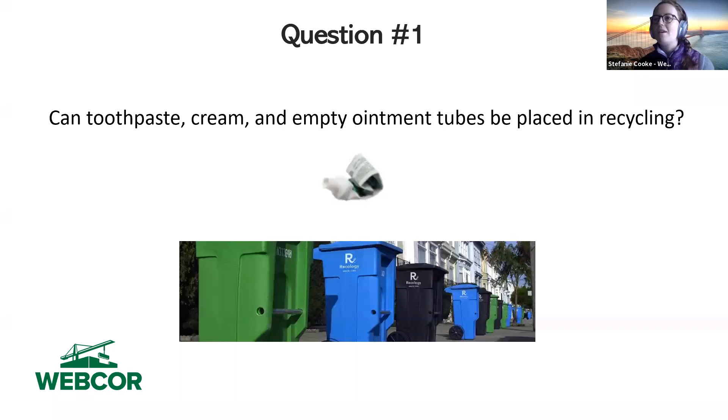Question two: envelopes with plastic windows are recyclable, true or false? This one is actually true. I initially thought you had to rip out the plastic window and recycle them separately, but these can actually be recycled together.

Which cart do daily contact lenses go in? Green for compost, black for trash, blue for recycling. This is actually a trick question, because it goes in none of these. There's now a program TerraCycle has partnered with — Bausch and Lomb, I think is the name of the company — and they will collect your daily contact lens boxes and recycle those. Again, reach out to myself or Adele. If not, they go in the trash.

On to the next question: plastic bags with the chasing arrow symbols are recyclable in the blue cart, true or false? This one is actually true and false. Typically, if you just throw one plastic bag in the recycling, it cannot be recycled — it often gets caught in the machines, it's too small, and it's obstructive to the process. However, if you group your plastic bags together, like put a bunch of them in a smaller plastic bag about basketball size, you can put that in your recycling and they'll recycle it. Or take them somewhere like a Lucky's down the street from me that recycles plastic bags. A lot of retailers like Best Buy or Target also have a collection point for plastic bags. Or even better, avoid plastic bags altogether.

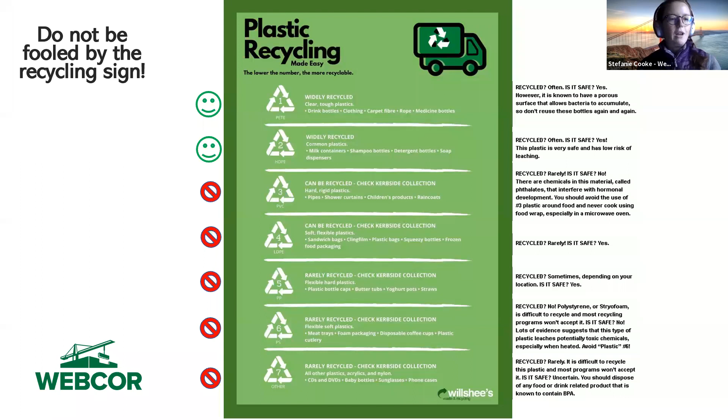So don't be fooled by the recycling sign.

Question 5: utensils, which cart do they go in, blue or black? This kind of depends what county you're in, but typically they go in the garbage. If you're in San Francisco, however, they do recycle these, so you can clean them and put them in. As a general rule, small plastic items are difficult to recycle because they're too small. A pro tip: don't order plastic utensils. When you order takeout, just ask for no utensils and use reusable cutlery.

Question 6: paper towels, which cart - compost, trash, or recycling? We had a big discussion on site about where these need to go, because it's paper towel, not just paper. Paper towels go in compost, always. They can't really be recycled because the fibers are too short, from what I learned in research. So even if they're dry, put them in compost. Typically paper towel gets dirty anyway, it's got food on it, so it can go in compost. Don't put them in the trash.

Next question: do or don't bag your recyclables. I've seen my neighbors doing this - this is false, you do not want to bag your recyclables. One, the crews sometimes don't know what's inside the bags when they pick them up, so for safety reasons they'll just throw it in the trash. Or two, the plastic bags can get destroyed or caught up in the machines. So again, do not bag your recyclables - they should be loose.

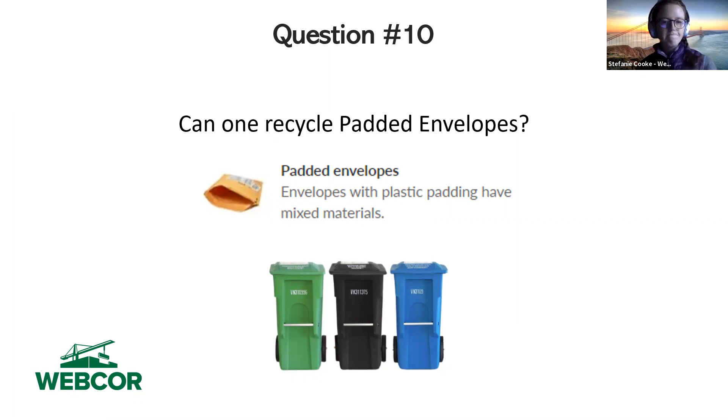Shiny food wrappers, can they go in recycling? The answer is no, they go in the trash, unless you're partnered with a program like TerraCycle. In my project we have a TerraCycle box right now picking up food wrappers, including candy bar wrappers and any bar wrappers - those can be recycled through TerraCycle. So unless you have a TerraCycle program, those go in the trash.

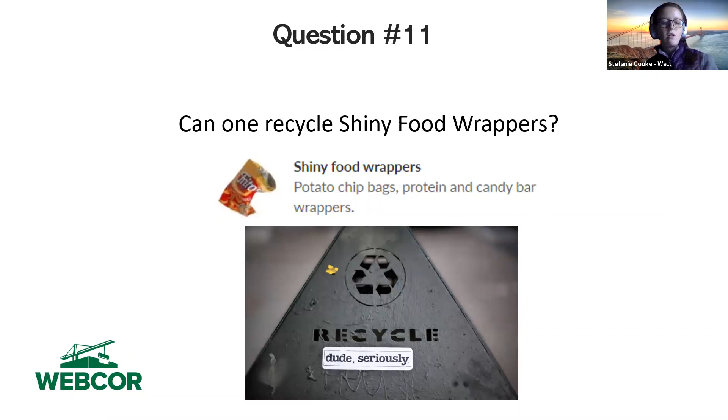This one came up because we use a lot of these on our project site to keep the area clean and sanitized. So can these be composted? I looked this one up for a while, and in reality, they cannot be composted. The reason is most of these off-the-shelf wipes have synthetic fibers in them, which is why they're stretchy and you can use them vigorously. They actually take decades to decompose.

Okay, and what about takeaway boxes? I also did a lot of research on this one, and it's kind of unclear, I'd say, and it depends on where you are. Here's my takeaway, and I'd be curious if anybody has more research or data - please share it with the group. Paper takeaway boxes can be composted. This photo underneath is from the Recology website, showing items that would be composted - anything that has food on it and is paper.

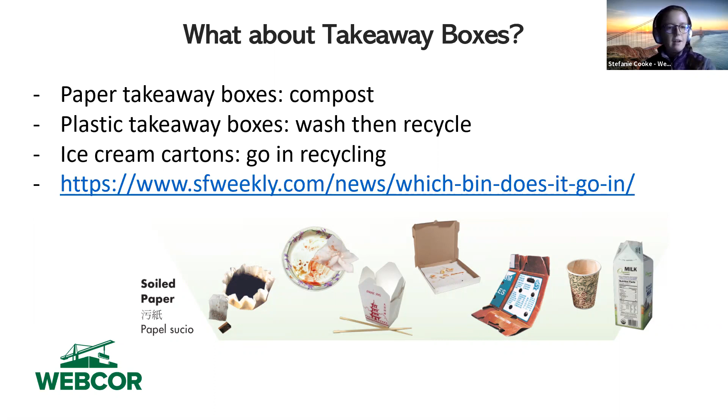If they're plastic boxes, wash them, then recycle them. Again, check the arrow on the underside of it, check the number and the arrows. And ice cream cartons would go in recycling once they're cleaned.

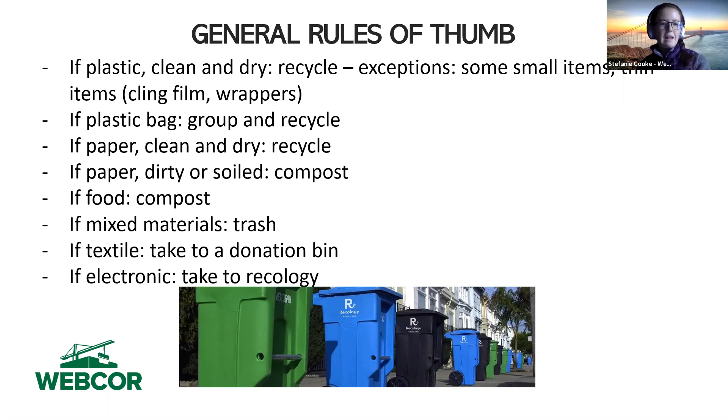So some general rules of thumb to wrap it up: if it's plastic, clean and dry, you're going to recycle it, with some exceptions obviously. If it's a plastic bag, group and recycle it. If it's paper, recycle it. If the paper is dirty or soiled, or it's paper towel, compost it. Food, compost it. And anything else, take it to the trash.

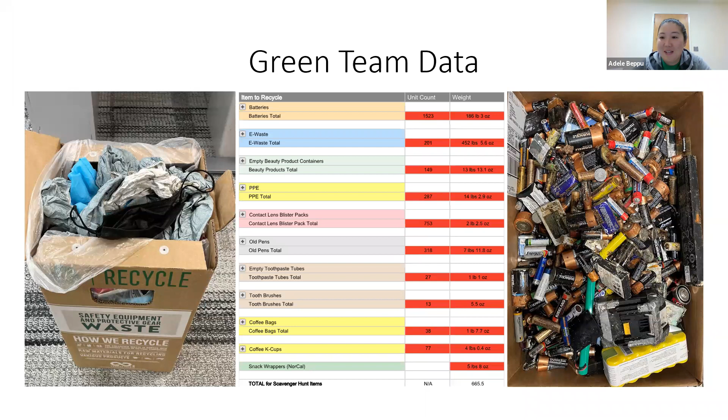As Adele mentioned, this recycling scavenger hunt was a month-long campaign, but we do want to continue this throughout the year. So let us know how we can help support you in doing that, as in the sustainability department.

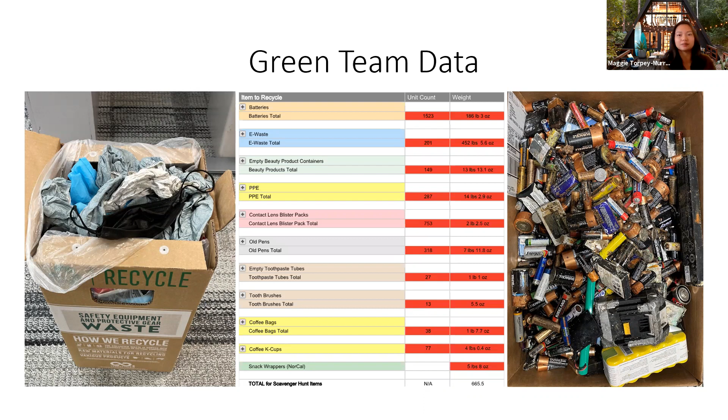So hi, thanks so much for having me. My name is Brock Hill, Vice President of Premier Recycle Company and Vice President of the Construction Demolition Recycling Association. Our company works on many of your projects here up in the Bay Area, and it's been a pleasure working with you all. Thank you very much.

Let's talk about some of the changes in the waste industry right now, specific to C&D waste. Material generation continues to remain high, and that was kind of a shock to us, because in the first downturn, when most projects shut down, we almost went to zero. But the second they started bumping up the requirements for construction sites, we saw material shooting through the roof.

It was more than a regular amount to us. We were having some of the busiest days we ever had. I think it was due to a push to finish projects before a possible anticipated downturn. It's the only thing we can correlate it to. I asked other industry colleagues and they saw the same thing, especially here in the Bay Area. The material composition has also changed.

As new construction slowed to a halt, what we saw was a lot of generation of TI material. And material from TI jobs is generally lower in diversion. So we see non-recyclable carpet tiles, ceiling tiles, vinyl, insulation, all of which can't be recycled, and we saw a lot more of that.

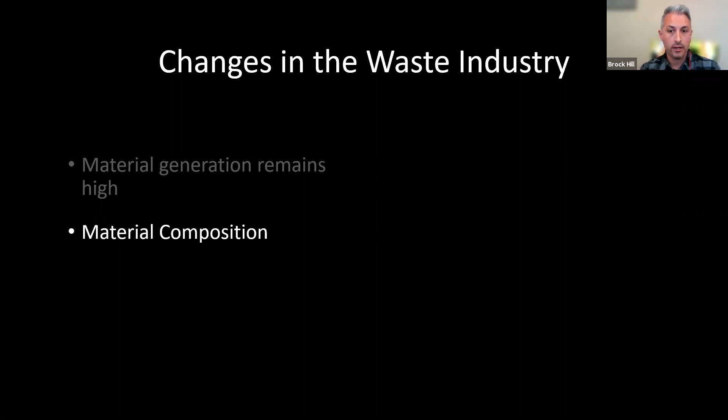The next trend we're seeing is mass timber. Right now it's touted as more sustainable and kind of the hot rage with architects. The mass timber projects we're working on right now generate much more plastic than normal construction. This is due to how the mass timber itself is wrapped and prefabricated before it gets to the job site. So although we're not seeing as much wood waste from those projects, we're seeing a lot more PVC wrapping.

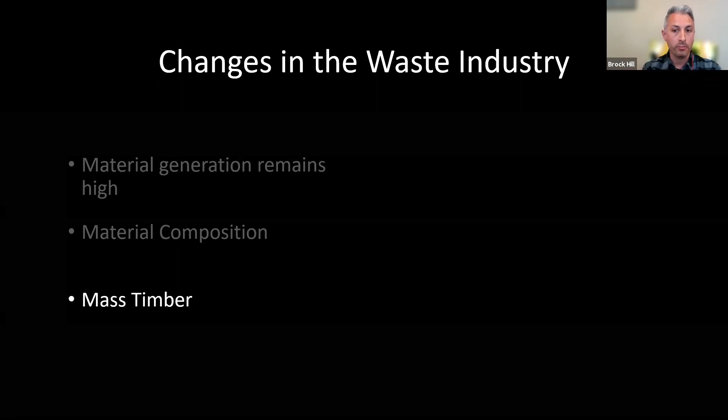The next is modular buildings, and this is kind of the same problem as mass timber. We've got a much smaller amount of waste, entirely almost plastic, non-recyclable PVC wrapping.

To give you an example, we did a project in Berkeley with a company doing a modular building, and they produced about 5% of the amount of weight that we would typically see off a project of that size, but they also got less than a 10% diversion rate on that project. What we had to do is go back and advocate to the city of Berkeley to show overall sustainability, not just based on weight like the cities are used to seeing. So if you're approaching these types of projects, that's something you want to keep in mind, at least on the sustainability team, that you may have to go to bat for your project because the city doesn't quite understand what you're trying to achieve.

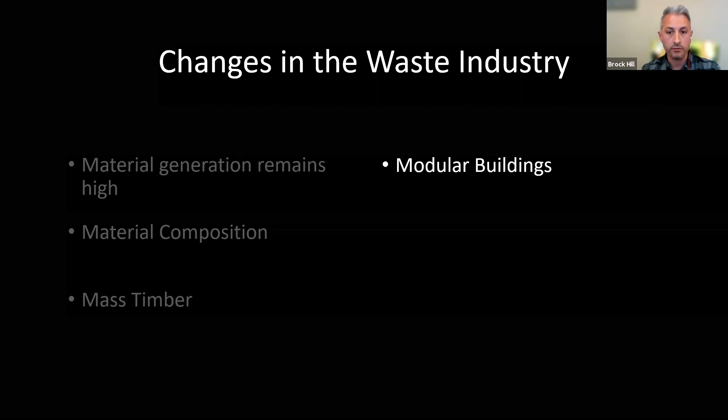There's also changes happening in LEED and Living Building Challenge. In version 4.1, LEED has decreased the allowable points for construction waste. This was a trade-off in dealing with our industry and the USGBC to decrease the amount of source separation for tight lot line projects, especially in the city of San Francisco, but also gave you another point for going to a third-party certified facility. So they get accurate diversion rates, and they let you do a little bit less source separation because you frankly just don't have the room on those types of projects.

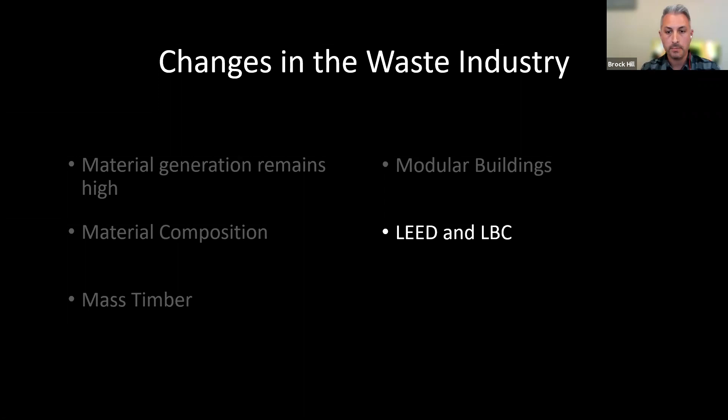With LBC specifically, there are challenges because it was designed for residences and small projects, mainly the requirement to recycle all the carpet, foam, and insulation 100%. So we're working with LBC and their team to figure out how to do this on larger projects. Does that requirement work? Does it not? The feedback is still in progress right now.

Moving on to the realities of recyclability of material. Mixed facilities usually get the tailings after the metal and concrete are removed by either the GC or the subs on site, a lot due to source separation. And we found as drywall manufacturers start to get involved, mainly due to the work of the closed loop project, taking drywall back to the manufacturers themselves, mixed facilities are really getting the tailings and the hard to recycle things at the end of the day. So you're going to see mixed facilities diversion rates going down over time, but that's not necessarily a bad thing, as overall diversion rates are up.

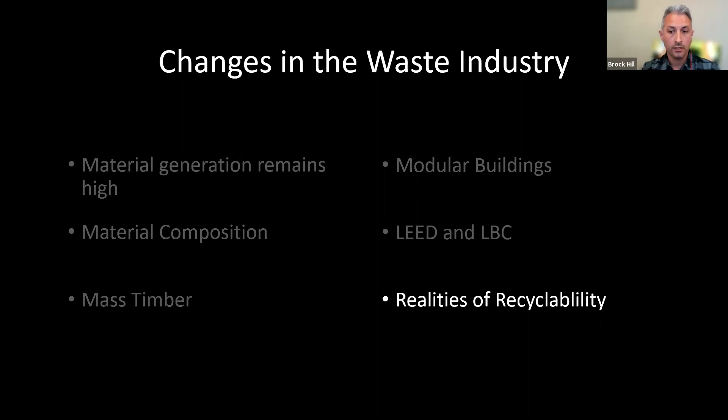So a little bit about markets right now. We've got in California the loss of the cogen power plants, and this is due to the subsidies on solar - they couldn't afford to compete. There was also a push by environmental groups to eliminate emissions from these plants. But C&D wood was the main driver of these power plants to try and keep it out of the landfills, and it's too dirty for mulch. A lot of that mulch is used on the side of highways, or the very clean dimensional lumber that's ground up can be used in playgrounds, but you have to make it to a real high spec. So most of the C&D wood ended up in these cogen power plants.

They make mobile units that can be put out at sorting facilities around the country, or you could get the air permit and do it on the job site. You see it a lot in the Central Valley right now to eliminate open burning. A lot of wineries use these type of machines.

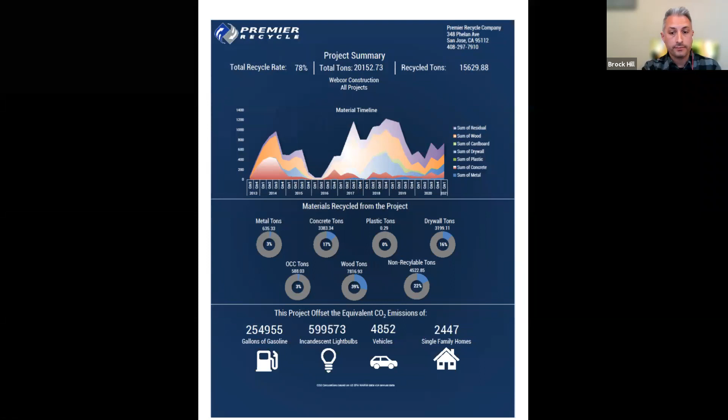So, what could you do on site to make your projects more successful? I say the first step is a good construction waste management plan. These are mandated by a lot of cities, and I see a lot of boilerplate ones come through our table. When you just hand that to a project team, they look at it, their eyes glaze over, and they say, okay, cool, somebody else will handle that. But when you have a very well-written plan, it's straightforward, it's simple, and it helps the project teams actually know what they're supposed to do, how they're supposed to do it, and where stuff goes.

We've seen massive success with waste management plans that are written well, specifically for the project, not boilerplate. Simpler is better—your team will thank you for the clarity. But strict management of these waste plans by the GC is necessary. If you allow the subs to handle it, it goes off the rails. So keeping it tight within the GC is the best way to go.

Also, you could join with like-minded organizations, such as the CDRA. We're actually looking for GC members to give their input on what's happening out in the field. We see your materials, so we see ourselves as more or less a construction subcontractor, but by aligning our two goals together, I think we'll really push the industry forward. We're not as separated as people think, because we're handling your material. So I think it's in everybody's best interest to work together.

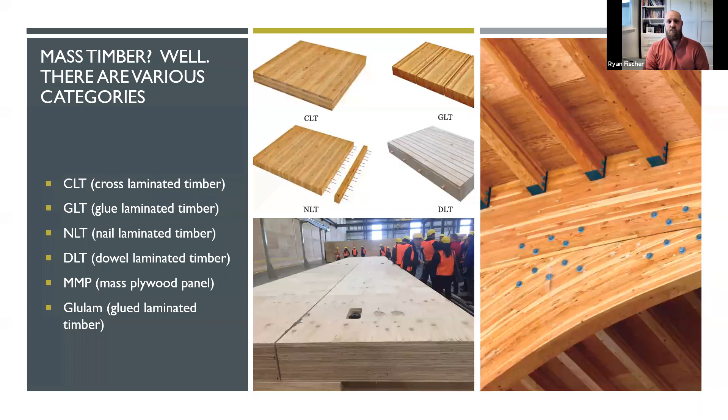Today, if you want to go to the next slide please—we're going to focus on CLT because it's the most common one we're seeing on every project right now. It's basically what you can see in that lower right-hand picture: a mass timber element that gains a lot of its strength by cross-laminating dimensional lumber in both directions, in a major axis and a minor axis.

This way, the timber industry can utilize smaller dimensional lumber, sometimes 2x6s, common dimensional lumber we'd see in construction generally, but putting it together in a way that optimizes its strength. Wood is anisotropic, meaning its physical properties change depending on which axis you're applying force. So by laminating it perpendicular, we can essentially replicate a two-way concrete slab. What we commonly see as formed post-tension slabs or even two-way mild steel slabs can be replicated through the use of laminated timber.

At the same time, it does give us an architectural element that allows for an exposed soffit. We're seeing in most designs now that the top of the slab still gets a small concrete cap, mostly for acoustics, but also for concealing some of the in-slab electrical we'd typically see within concrete slabs. But it does allow us the opportunity to leave open ceilings, which is another reduction in materials, sometimes without adding T-bar and drop ceilings or covering with drywall.

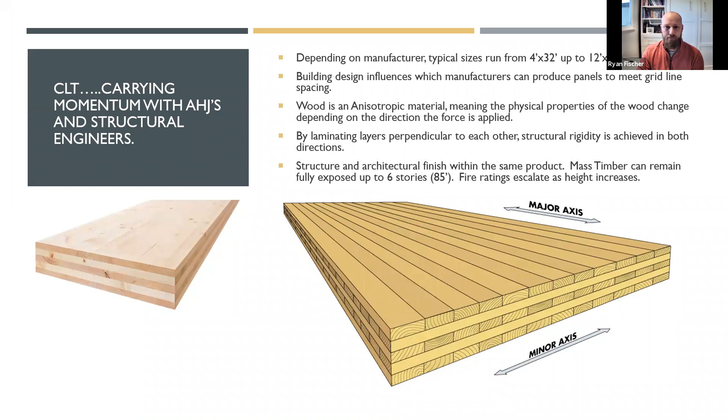Go to the next slide, please.

Talking about timber from a sustainability standpoint perks people's ears a little bit. People think about logging or deforestation, but that's not really what we're talking about within the timber industry and what's being used to create these mass timber elements. It's really more similar to farming of timber, where there's a thorough process of understanding growth cycles, replanting, and access to areas for harvesting, turning it into a farming cycle rather than a logging operation.

Most of the common species we see being used are conifer species, such as Douglas fir, spruce, pine, and hemlock. There are others out there as well, but these are the main ones, mostly because they have an excellent strength-to-weight ratio and are also just aesthetically sound. They're not very knotty and have a pretty consistent color, so you can really lean on that aesthetic side of it.

There are many regulatory groups and certification programs. Most notable is the FSC, or Forest Stewardship Council certification. It's all to ensure that requirements are being met for minimal impacts, both from harvesting and replanting—anywhere from the access roads being cut in, to how the land is used during the time of growth. A lot of these areas can be utilized for outdoor recreation as long as it's planned out properly. So it's really a very long-term planning around the harvest of the lumber.

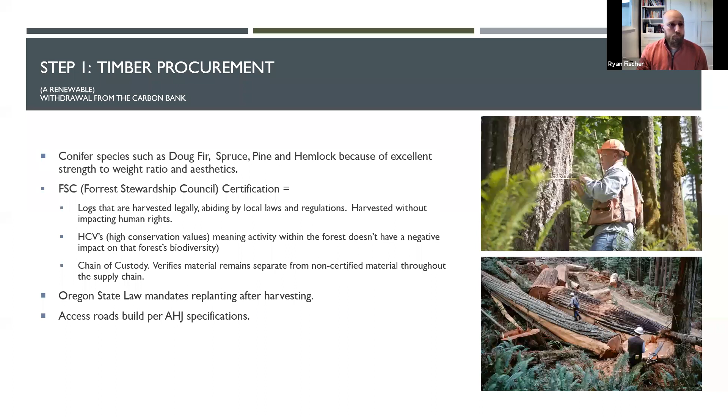There's also a lot of local regulations. Oregon seems to be leading the charge somewhat, as well as Washington, on pushing the bounds of what's required in order to maintain sustainable harvesting of the lumber. Next slide, please.

After harvesting, the two main steps before you have a product ready to use are milling and drying. Once the raw material is harvested, it needs to be brought to a facility for milling, to get it down to a size and shape.

Sorry, I think I'm getting a lot of background noise. Greg, that might be in your office.

Getting it down to a size and shape that best allows for drying. The drying process is twofold: it lowers the moisture content so that, one, it creates a more dimensionally stable product—so you're not seeing a bunch of change in size and shape once you have a fabricated piece you're going to use for construction. But it also reduces moisture that would otherwise impede the proper gluing that happens in the subsequent manufacturing processes that Greg will dive into shortly.

Something notable that a lot of the industry is doing in the milling process—facilities such as Nordic are a prime example of a mass timber manufacturer minimizing the impact of the harvesting-to-milling process by harvesting from very local growths. They're basically building and setting up their mills in the area where they're harvesting from, so there's little to almost no shipping required to get from raw harvested material to the mill.

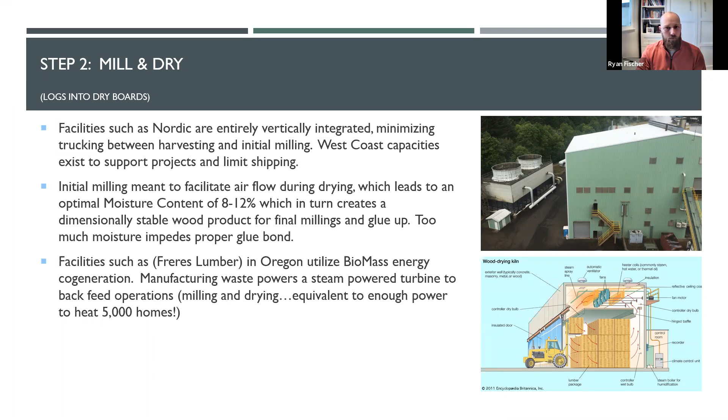Once the material is kiln dried and milled down to the appropriate shape, we'll move into step three: visual inspections and strength grading. Greg, if you want to step in.

After that initial drying sequence, there's a final milling to bring the wood to its proper dimension, and you don't want to do your final milling until it's dimensionally stable, which is achieved through the drying process. Much like a lot of manufacturing industries, screening and artificial intelligence operations are being utilized to understand where the weak spots and knots are, and classify, sort, and trim as necessary so that only acceptable wood ends up in the CLT panel. The waste and cutoffs can feed directly into the cogeneration power plant.

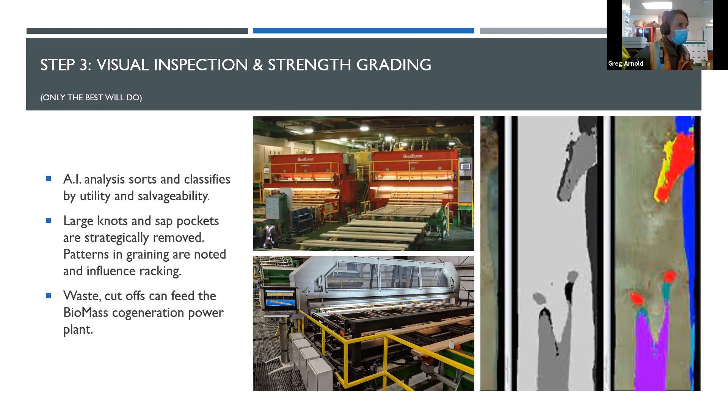A German glue manufacturer, Henkel, produces a product called Loctite HB X Purbond, which coincidentally is used in about 95% of CLT that's manufactured globally. The benefits of this glue are listed below.

It's a one component system, meaning the manufacturing plants don't have to do batching or mixing, which is beneficial for reducing human error. Also, because it's 100% solids, there's no entrained liquid, meaning less product needs to be shipped to the manufacturing facility. It has zero formaldehyde or solvents, so the off-gassing from this glue-up product is very minimal — in fact, not detectable by human air quality standards. It's UL Greenguard Gold certified.

Another advantage is that what sets the process off is not reliant upon heat or energy — it's actually the residual moisture, which is 8 to 12% in the wood product, that facilitates the glue bond. The Henkel engineers are pretty crafty. Depending on your manufacturing process and how much open time you need to get racked up, the curing time is about 3 times whatever the open time is, which incentivizes manufacturers to rack up as quickly as possible.

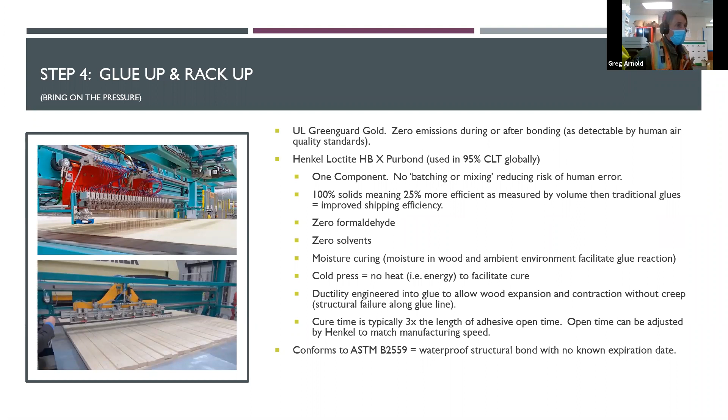Given the technology, it can happen as quickly as 3 minutes, meaning you're fully cooked in 10, or 12 minutes including the rack up time. Anyways, next slide, please.

There are 2 ways to apply pressure: the vacuum press and the pneumatic press. The vacuum press is typically used when there's a curved component where you need to build a form to apply pressure, because it does an excellent job applying 3-dimensional force. A high production facility is typically going to use a pneumatic press, pictured on the lower right-hand side.

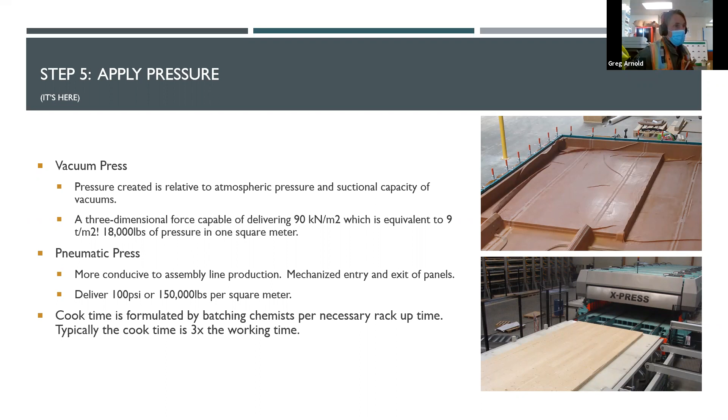Next slide, please. Some good factoids regarding CLT and mass timber in general.

Manufacturing is done to tight tolerances with CNC equipment, so when it ships to the site, the offcuts and waste that typically end up in debris bins are non-existent, and they can actually be fed into the cogeneration facility, as we mentioned earlier. As Ryan said, considering mass timber's pleasing appearance, it's often not covered up in metal stud framing, drop ceilings, or sheetrock paint — those materials can actually be left out altogether.

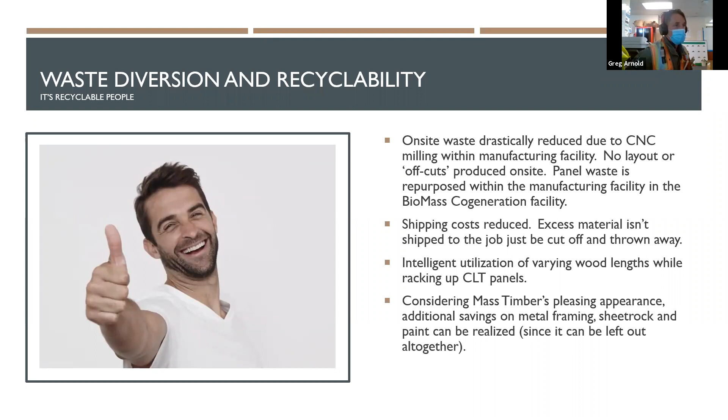Next slide, please. Some interesting, fun factoids.

One cubic yard of concrete creates 400 pounds of CO2, according to the Portland Cement Association. One cubic meter of wood has the potential to sequester 1 ton of CO2. A typical concrete and steel building has an emission profile of 2,000 metric tons of CO2; inversely, a mass timber building could potentially sequester that same amount of CO2. Globally, the building industry contributes about 40% of CO2 emissions, which speaks to our obligation to do a better job reducing emissions as an industry.

At the end of a building's life cycle, much like a barn structure in the Midwest, those timber components can be reused. They disassemble just as quickly as they assemble, typically with just screws, so those components can be repurposed when the building life cycle has reached its end. Another interesting factoid is that we're becoming an increasingly urban society, so figuring out a way to build more sustainable high rises is ultimately better for the planet.

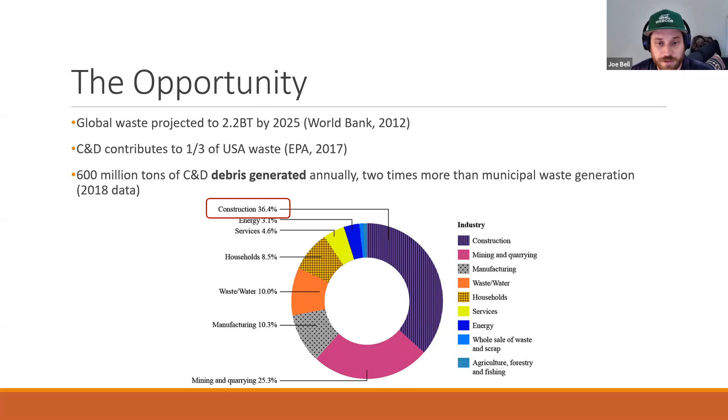Next slide. Some of the things happening locally, I know within San Francisco—a fair amount of us live either in San Francisco or in the Bay Area—a lot of the goals are to reduce waste progressively down to zero, or as close as possible to zero. So this is a little small piece of our big pie that we're trying to come up with an efficient solution for. We're still in the process of it, but again, just highlighting some of the opportunities we have to do this. Next slide.

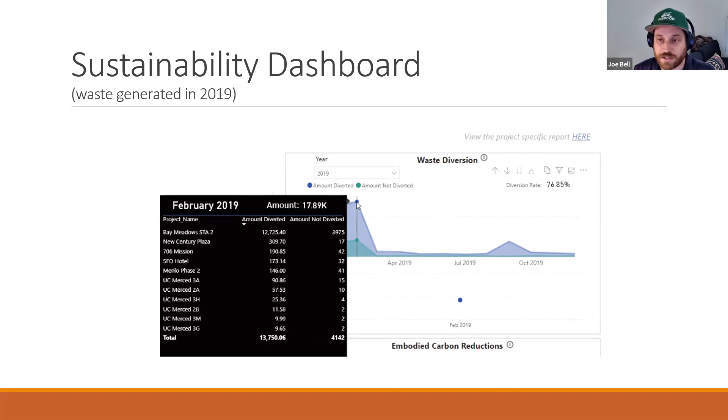Next slide. There's another view of the sustainability dashboard, just highlighting the opportunity. The little green line at the bottom of the graph is the opportunity to reduce or increase that diversion rate even more. It looks very small, but it's actually many, many tons every year. Next slide.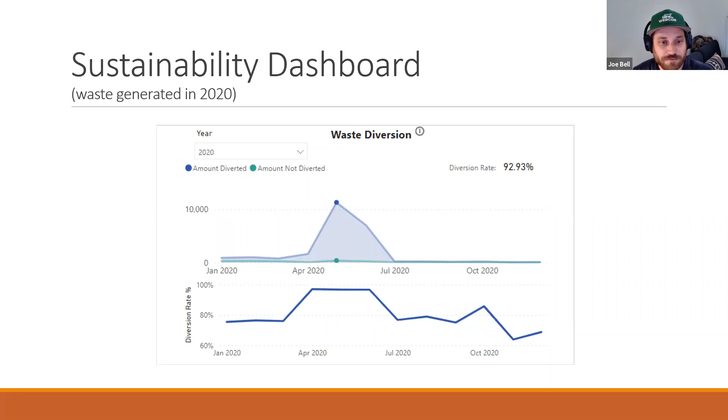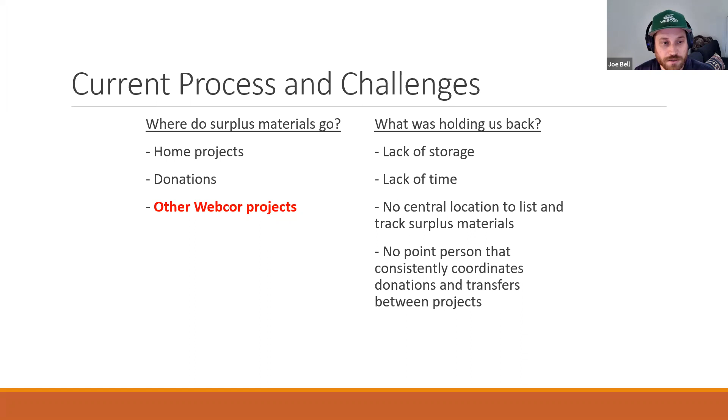But then we end up with red flagging, yellow flagging, floor protection, screws, nails, things that can easily be used that would otherwise be thrown away.

And then when it comes to building materials, oftentimes I think we probably end up with plywood, 2x4s, and lumber. That often will go from job to job as long as a job has the opportunity and ability to take it and store it.